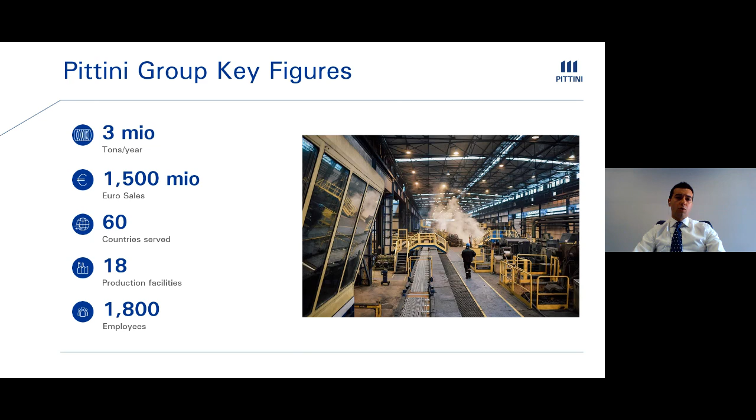For what concerns wire rod, the company is producing every year 2 million tons of wire rod for building and industrial application, from a total production of 3 million tons of steel. We have two wire rod mills, one located in Osoppo and one in Verona, both in the north of Italy. The Osoppo mill produces more than 1.2 million tons of wire rod per year and is mainly focused on the production of low carbon wire rod. The Verona plant produces more than 700,000 tons of wire rod per year and is specialized in the production of medium and high carbon wire rod.

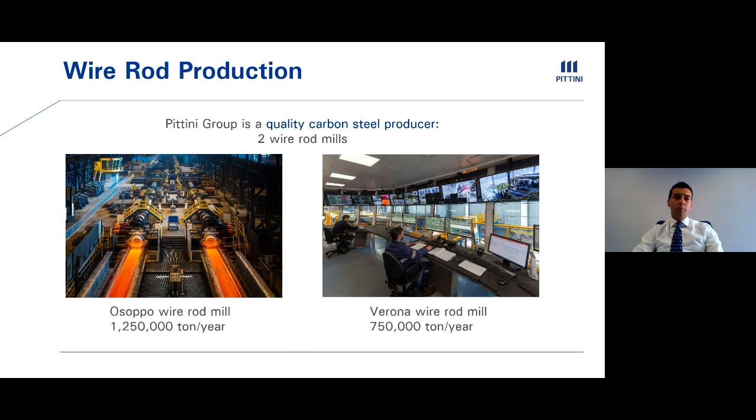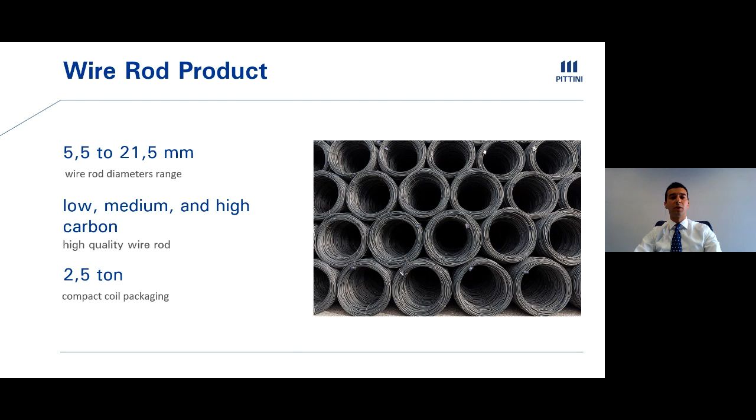Both wire rod rolling mills are designed for production of smooth and ribbed rods. The wire rod range of diameters goes from the standard 5.5 millimeter up to 21.5 millimeter. We produce high quality wire rod from low carbon grades up to medium and high carbon. As mentioned, the Verona plant is specialized in medium and high carbon steel and produces up to C82 carbon content wire rod. The standard packaging of the coils produced within the Pittini Group is a compact coil of 2.5 tons each.

Thank you for this overview. And why the decision to make a brand new wire rod mill in Verona specifically? Well, Pittini Group is a well-known brand in low carbon wire rod. The target of the new Verona rolling mill is to make an upgrade for what concerns wire rod offer - not only a general improvement of low carbon drawing quality, but introduction of medium and high carbon grades as well, which allows us to open new markets for the company, different and additional to existing ones.

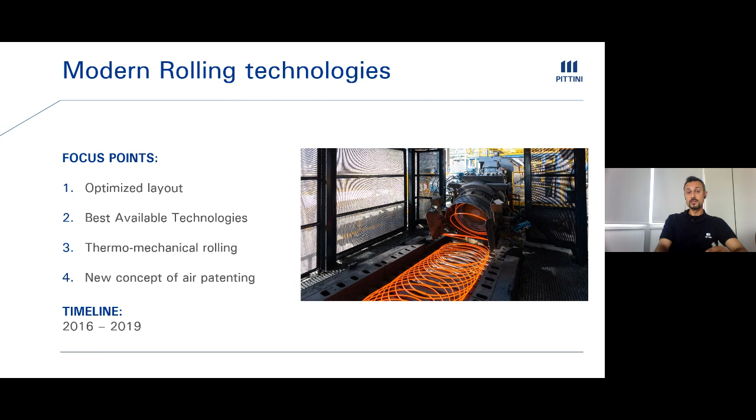Okay, so you talk about the layout and many other points, but let's start with this. Yes, well, let's take a look at the rolling mill here.

We need to highlight that one of the main benefits related with the construction of a brand new rolling mill is that we have the possibility and the opportunity to think and place each equipment in the right place, without compromises. This means that the distances between each specific component were optimized for the rolling process in general.

After that, we have the 4-stand high-speed roughing mill that was specifically designed in order to have the optimal deformation speed and reduction of area needed to squeeze the material and seal all the micro voids and micro defects present

inside the original billet. Just to digress for a moment, we need to remember that the billet is a cast product. This means that it brings inside the billet all the metallurgical features of a cast product, and we need to take care of this since the beginning of the rolling process.

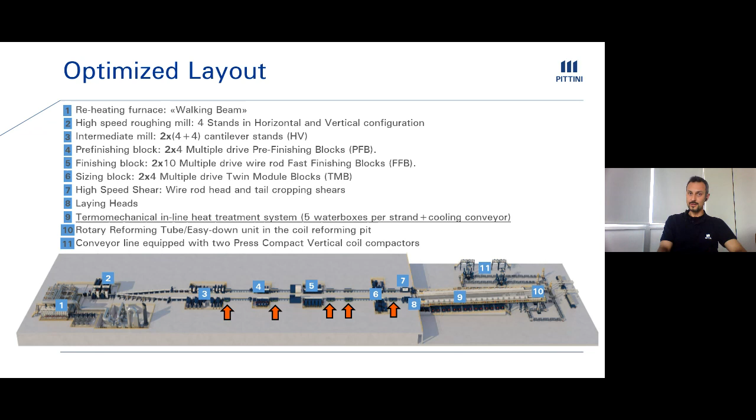Okay, thank you very much. And you talked about a lot of technologies there. Which are the best technologies that you use on this mill?

Yes, concerning the best available technologies, we can underline two main aspects. The first is related to the equipment, and the second is related to the automation features of the mill. In relation to the equipment, earlier I mentioned the reheating furnace for the billet.

That is a walking beam type furnace with two-side heating and selective temperature management for 9 zones. That's for uniform heating of the billets and to optimize the billet temperature and get a smooth and uniform rolling process.

Passing through the selection of a no-twist rolling for the intermediate mill, that allows us to avoid any quality issue that can be connected with the twisting of the material during rolling. These are mainly related to, for example, superficial defects on the wire rod.

And then the 4-step sizing block, that is the final step of the rolling. That guarantees the best sizing process.

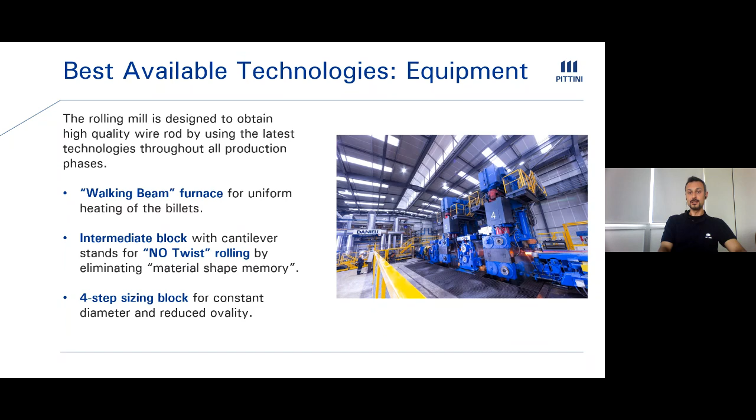For what concerns other examples about the equipment on the line, we have two other things we can give as examples. The first is connected with a high-speed shear that is able to crop the head and the tail of the product. With this equipment, we are able to guarantee best homogeneity along the coil and defect-free tips of the coil.

And after that, we need to mention all the equipment that is mainly responsible for the packaging of the coil, like the laying head with wobbling system, several steps on the cooling conveyor, and the final rotating pit with easy down, that can help us get the best packaging for the general coil.

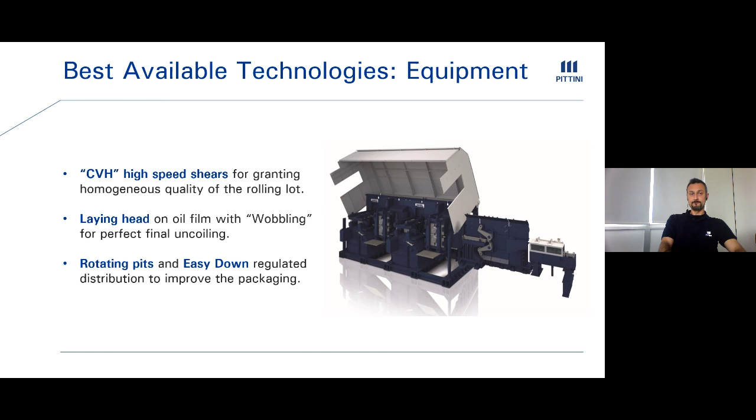Well, as I mentioned earlier, the second point was related to automation. About that, we can say that our rolling mill has been designed according to the Industry 4.0 concept and is featured with the cutting-edge technology of steel rolling.

For that, the plant was designed in order to control the entire production process. Basically, you can consider that we have 50,000 pieces of information through the network and constant monitoring and control of the section of the product all along the line.

This, with dedicated devices that are called high section, high gauge, high profile, but in general, the last of these can already give a prediction of the final wire rod shape and diameter, and can make the final step of the rolling process very smooth and precise, that, as mentioned earlier, is the sizing step.

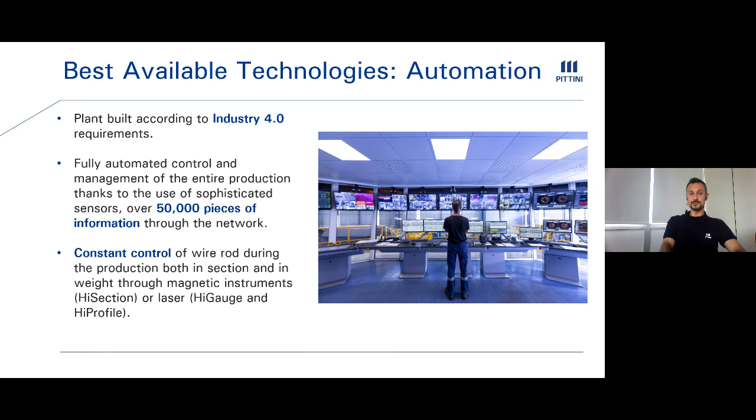So a lot of technologies, but I think the real core of the plant is the thermomechanical rolling. So what can we say about the technology used by Pittini on this mill?

We need to say that in modern rolling, a key role in obtaining quality rolled product is played by all the heat treatment along the whole process, joined together with the final cooling in the cooling conveyor. But how does it work? Basically, the temperature control along the rolling line, guaranteed by each water box, allows us to apply the rolling deformation at the desired temperature. As a result, it is possible to apply the thermomechanically controlled process.

It might be useful to give a little background here. We need to consider the microstructure of the steel, which is formed by austenitic grains. The thermomechanically controlled process allows us to get a smaller austenitic grain size during rolling and keep it until the cooling conveyor. This feature is one of the main aspects behind the final product property enhancement, related to the thermomechanical control process.

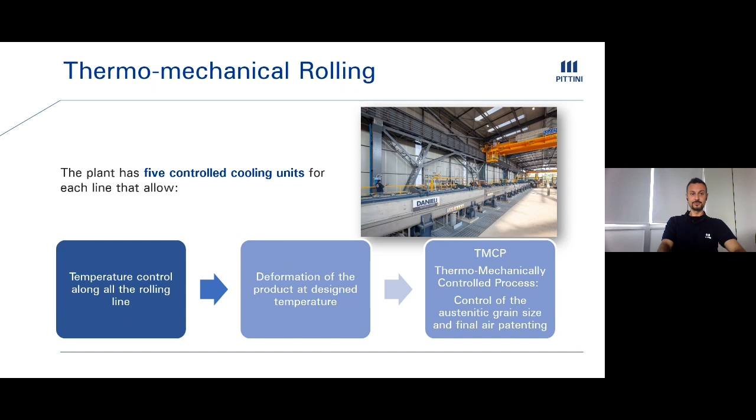Talk a little bit about air patenting. I see that in this mill you have a new concept of air patenting. Can you explain more?

Yes, some particular features of the cooling conveyor and air patenting treatment are represented here. On the right side, for example, we can see another key point of the whole process, the specific new design of the cooling conveyor nozzles.

Practically, below the roller table, inside the cooling conveyor, we have installed this specific new model of nozzles that can guarantee the best homogeneity of the forced air treatment, ranging from the lower flow rate, meaning lower cooling rate for the product, to the highest cooling rate achievable nowadays in an air patenting process.

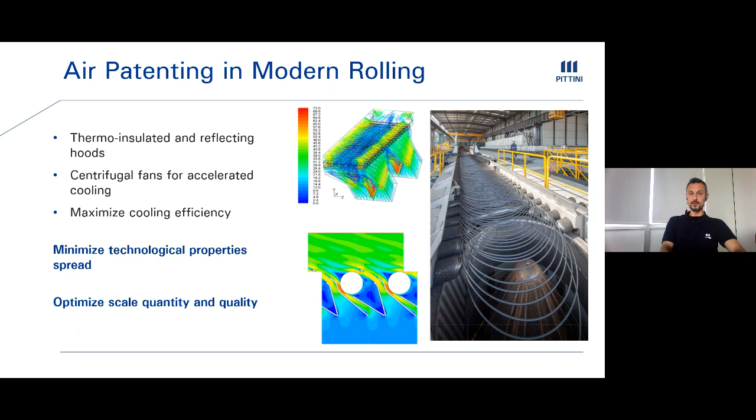Okay, so you are a man of the quality department. Can you tell us more about the controls during production and on the final product?

Yes, starting from process control, here is an example of what happens during final air patenting of 13 millimeter diameter high carbon wire rod. This is a very interesting survey activity of what really happens on the cooling conveyor.

Here is represented a real temperature profile during the final air patenting phase, and in this case it's possible to see the position of the phase transformation from austenite to pearlite, shown here by the orange arrow. We can also see that the transformation is well inside the area covered by the air fans, which extend more than 50 meters. This clearly demonstrates that the maximum cooling capability of the conveyor is still far from being reached.

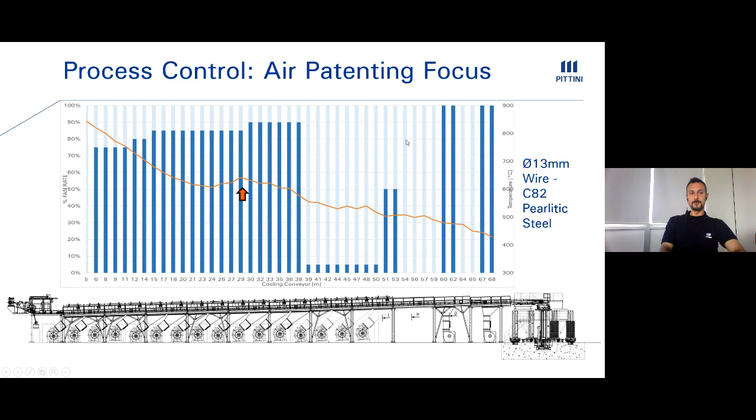I would like to finish by saying something about product control. Here it's possible to see an example of two main aspects related to microstructural features concerning pearlitic high carbon steel. In general, we consider two main aspects of microstructure, both on micro scale with the optical microscope and on nano scale with the scanning electron microscope.

For example, on high carbon pearlitic steel, particular attention must be paid to microstructural features like decarburization of the surface, superficial defects, and going deeper into the microstructure with the measure of interlamellar spacing of pearlite, and so on. These are just some examples of the needed laboratory control that we perform in our laboratory.

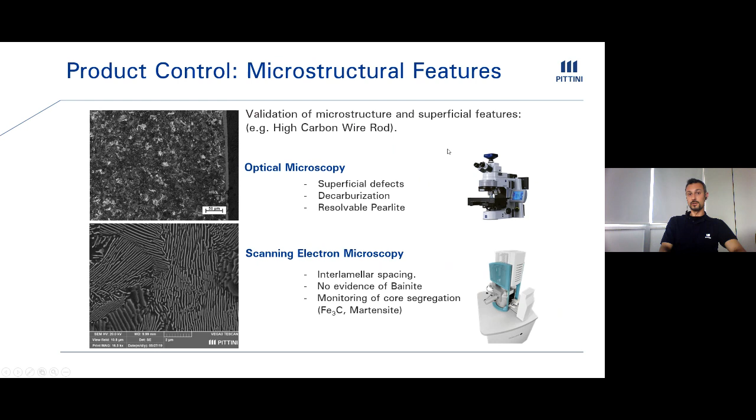And now I will leave the word again to Alexandru, just to ask him about the benefits of all these technologies on the quality of the wire rod.

Well, there are several improvements on the wire rod produced in the new Verona rolling mill, thanks to the thermomechanical and the air patenting process. From the users' point of view, we are mainly talking about mechanical and geometrical improvement.

Among others, the most important are uniform mechanical and metallurgical properties in the same coil and in the same heat. This is achieved, among others, by the core heating of the billet in the reheating furnace, guaranteed by the walking beam technology. The thermomechanical rolling and air patenting both play a key role in achieving this result.

In order to have uniform characteristics, we have to control the mechanical properties during the whole process, not only the tensile strength, but also elongation properties. These are very important, for instance, in the production of PC strand and springs.

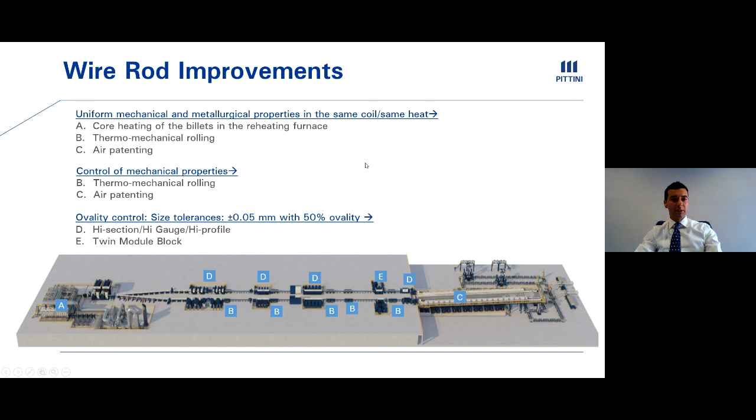There are other important improvements in our wire rod, which are connected mainly to surface, coiling, and coil weight. The surface has to be defect-free, and this is achieved again by the finishing mill that I have just mentioned, and by the 3 blocks for a total of 18 stands for each of the 2 lines.

For what concerns coiling, in order to have knot-free and defect-free coil, this is possible due to the laying heads and the conveyor wobbling for an optimal distribution of the material in the rotating conical pit.

The coil weight, as mentioned earlier, is 2.5 ton, and it is a compact coil. For the coiling, we are using a rotary reforming tube with the easy down unit. For what concerns compacting, a vertical compactor is needed and is there.

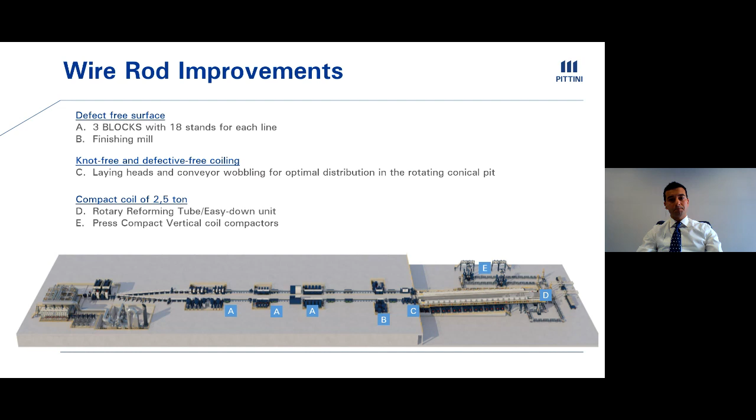These are some of the improvements that have already been done, but some others are on the way. Another very important improvement for the user of our wire rod is not related only to the rolling mill itself, but to the whole production process that starts in the melting shop.

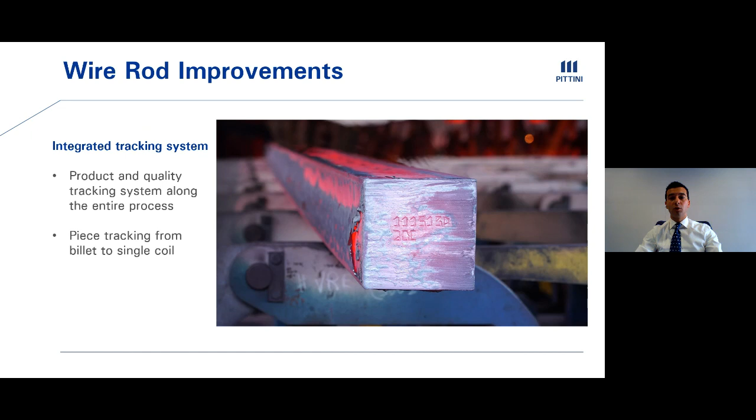So we are starting now to implement an integrated tracking system from single billet to single coil of wire rod produced. Basically, starting from the code of the coil, we can track all the history in terms of mechanical and chemical properties. This is very important for us in order to improve our quality standards, but this is also very important for the final customer, in order to have and give better services.

And for our customers, which advantages do they have in production and in their product too? Well, for what concerns the production, so the processes, there are several that I'm going now to announce.

We can split the advantages for the final application in two main categories: the process benefits and the benefits that are for the final product. The main target as a process benefit for the users is the increase of efficiency. Efficiency is a result of many factors.

Among others, for instance, an easier descaling of the wire rod, both for mechanical descaling and chemical pickling. This is important in the process and is observed also in the lower consumption of dies.

In terms of efficiency, a high drawing speed is also appreciated. A reduction of downtimes is observed thanks to less breaks in the drawing process, reduction of the head-tail welds, and a fast uncoiling. Also, the handling and stocking of wire rod is optimized due to the 2.5 ton compact coil.

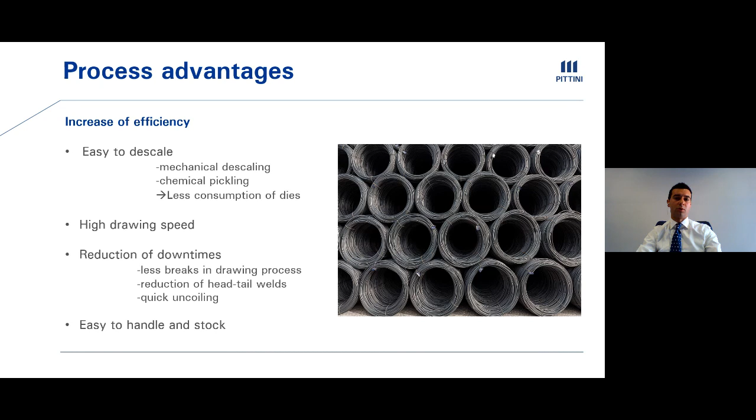For what concerns the final product, the advantages are mainly connected to the surface, which should be bright, free of defects and smooth, of course. But mechanical characteristics are also very important, they must be constant, as modern numerical control machines are very sensitive. And generally speaking, a better workability of the finished product is there.